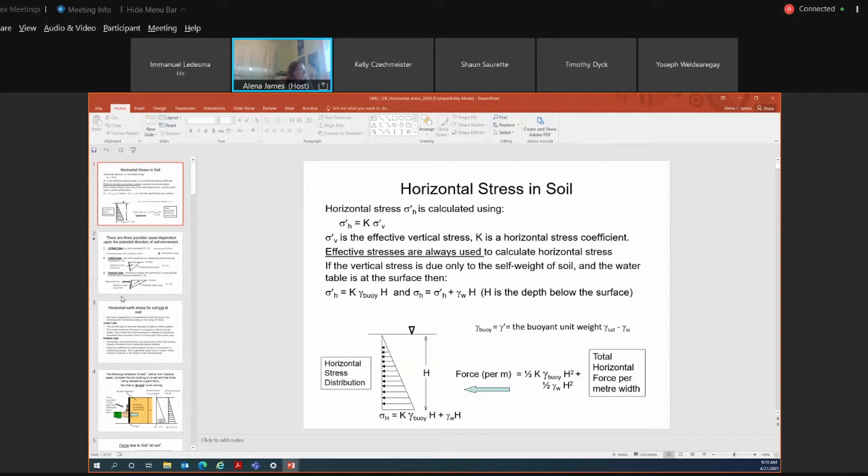There are 3 possible cases that may result in retaining wall design, and they're dependent on the potential direction of your soil movement. So if we think of a soil particle below the ground surface, that soil particle has a vertical stress, which is its overburden stress, and it also has a horizontal stress. We previously covered this in Module 4. That soil particle, when it's at rest, is not going to experience any movement.

The way we calculate our horizontal stress for that soil particle is we use our K0 value, which is our coefficient of earth pressure at rest, because that soil particle is not going to move. There's no external pressure being applied to it that would cause that soil particle to move. There is overburden pressure, but that overburden pressure isn't causing the soil particle to move.

The next possible case would be an active case. So if my hand right here is my retaining wall, this wall will have a soil mass behind it. Imagine this pencil represents part of that soil mass. This soil mass is trying to push this retaining wall downwards or outwards. There's a force being applied to that retaining wall that's trying to cause it to slide or overturn, pushing against the wall and moving it outwards. So that would represent your active case - soil pushing against the retaining wall and moving it outwards.

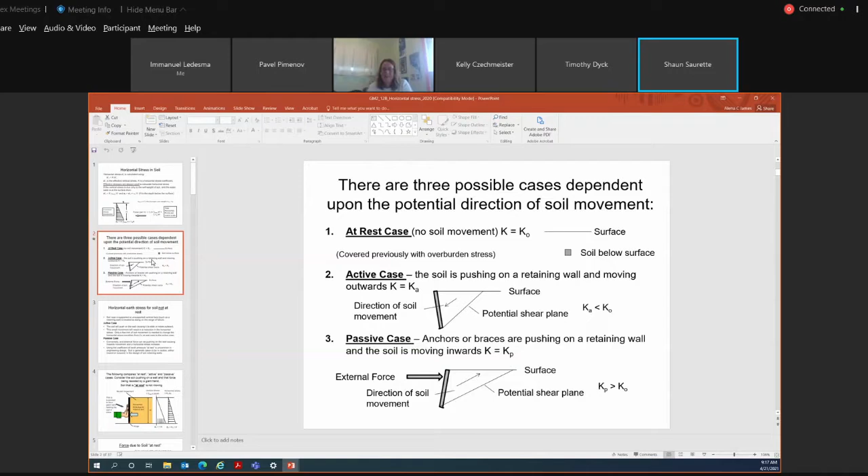Okay, so we use both of these forces in the calculation. It depends again on installation—you always use active, and passive depends on what type of structure you have. Cool, sounds good, thanks.

So if we think of our active case, our Ka value—our coefficient of active earth pressure—is always less than our K-naught value. So the horizontal stress associated with an active case is always less than the horizontal stress associated with an at-rest scenario. Whereas with our passive case, our Kp value is always greater than our K-naught value, so the horizontal stress or force associated with the passive case is always greater than your at-rest scenario.

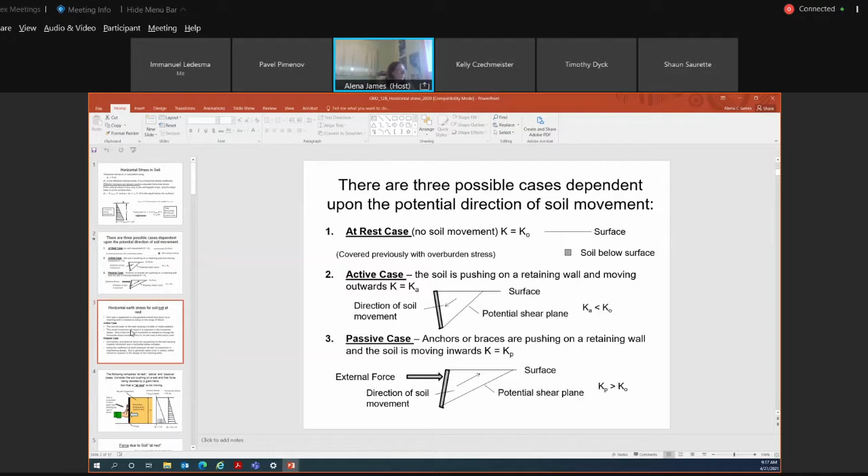Okay, we're not going to go over that again, I think I sort of covered it.

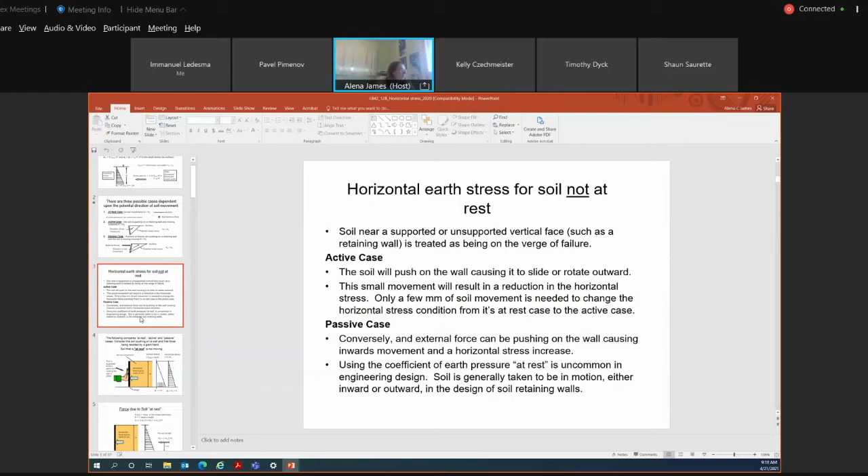This again is the same scenario I was trying to illustrate with my green pen and my pencil. This is just a schematic showing your at-rest case, where your retaining wall structure isn't moving. Imagine this is my retaining wall structure and I have a hand applying a horizontal force to that retaining wall structure, but my retaining wall structure isn't moving, so it's at rest.

If we look at our active case, again it's the same scenario where my hand represents the retaining wall structure, and imagine my other hand was applying a force to the left-hand side of it. If I decrease the pressure I'm applying to this side and relax my hand a bit, the retaining wall structure is able to move outwards, downwards, and outwards because I'm applying less force. So that's your active case.

And then your passive case would be the opposite of that, where if this is my hand, I have to apply additional force or pressure to this retaining wall structure to cause it to move inwards.

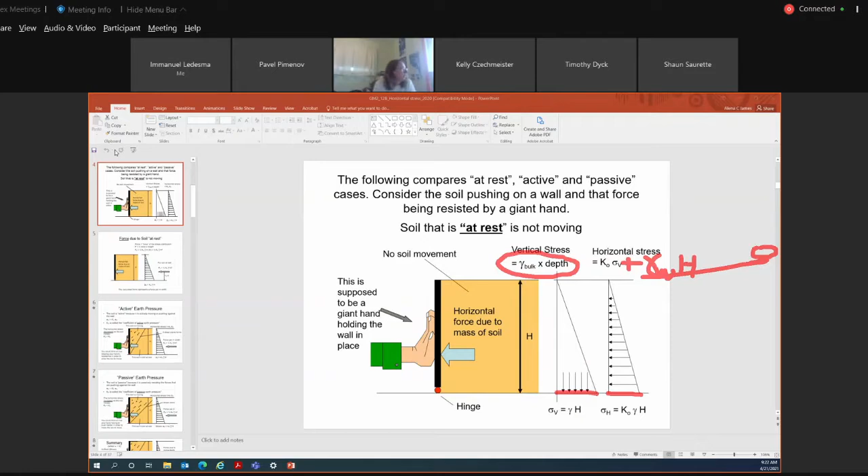Question about the saturated unit weight—probably we may have some questions on the test where we need to calculate that as well, based on the density. I'm not going to give you density, I would just give you gamma sat, but we'll go through lots of examples today where we look at scenarios where there's no pore water pressure associated with our retaining wall structure, and where there is pore water pressure associated with our retaining wall structure.

So we'll go through a wide variety of examples today.

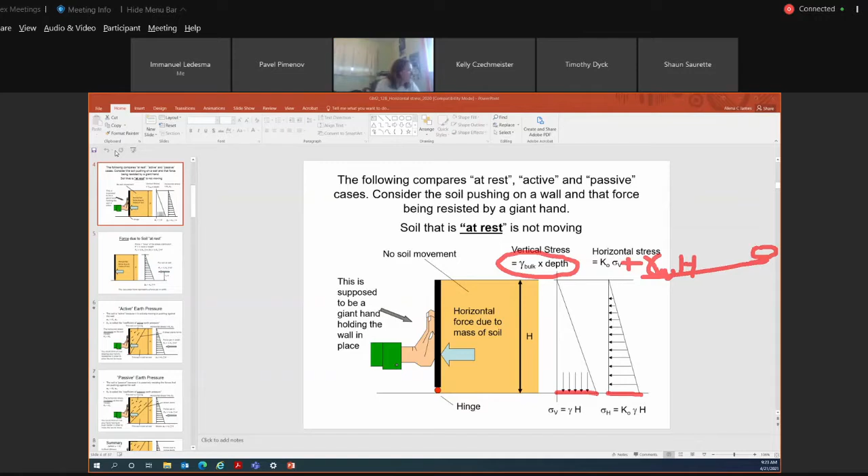So if we look at this slide here where it's talking about force due to soil at rest, we can calculate our total horizontal stress at the base of the sheet pile wall. In this scenario, we'll assume our sigma H, in this case we're looking at the at-rest scenario, but say it was the active case.

It would be sigma H is equal to Ka times gamma times H. This represents your total horizontal stress at the base of the sheet pile wall, and this represents the width of your triangle. If we look at the length of our triangle, the length is the same dimension as the height of the retaining wall structure.

So we know what the horizontal stress is at the base of the retaining wall structure. If we want to calculate the force, this simply is equal to the area of our stress distribution. You'll see our stress distribution is triangular in shape, so our force is equal to 1/2 times base times height, because this represents the area of a triangle.

If we know that the base of our triangle is equal to K naught, or Ka times gamma times H, and we know the height of our triangle is H, then we multiply that by 1/2. We can calculate what our force is that's acting on the retaining wall structure using this formula: PA is equal to 1/2 times Ka times gamma times H squared.

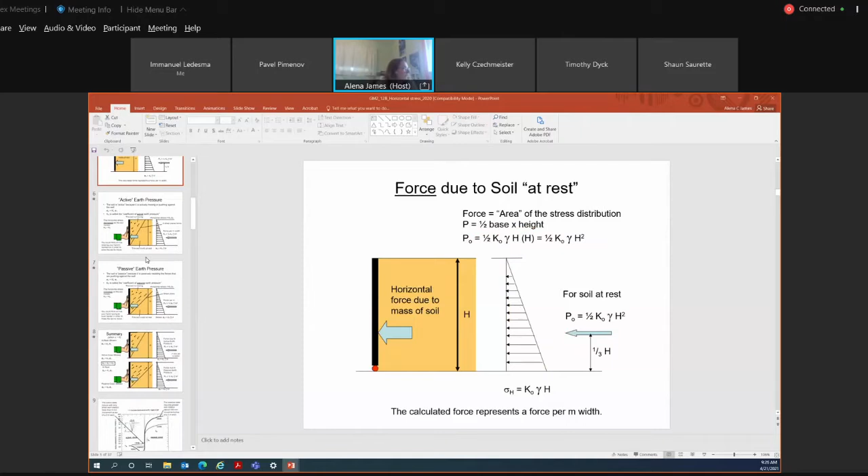It makes sense. We took uniform loads in statics as well, so it's very similar, just calculating different things. Oh, okay, good. Phew.

Okay, I'm going to go over an example problem. You guys are probably better at this than I am then.

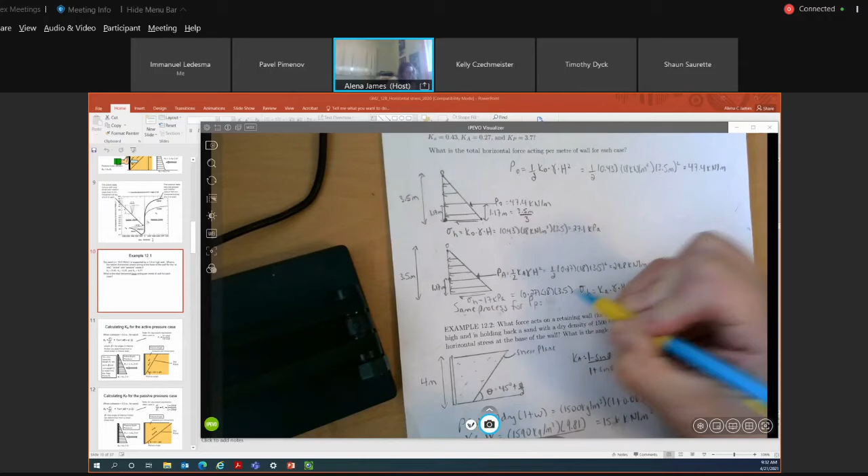I can substitute these parameters into the equation and calculate that my horizontal stress acting at the base of this retaining wall structure is 17 kPa.

If I want to calculate my total force acting per meter of the wall for the active case, I would use this formula: Pa is equal to 1/2 times Ka times gamma times h squared.

I know Ka, gamma, and h, so I can calculate my active force, which worked out to be about 29.8 kilonewtons per meter.

My next step after calculating my active force would be to determine where this active force is acting on the retaining wall structure. Again, my horizontal stress distribution is triangular.

Looking for the centroid of this triangle for a horizontal force, this horizontal force acts at a distance of h over 3 from the base of the retaining wall structure.

A distance of h over 3 from the base of the retaining wall structure is still 1.17 meters from the base of the retaining wall.

I would use the same process, which I haven't shown here, to calculate my total horizontal force in the passive case scenario.

In my passive case scenario, my horizontal stress at the base of the sheet pile wall would be Kp times gamma times h.

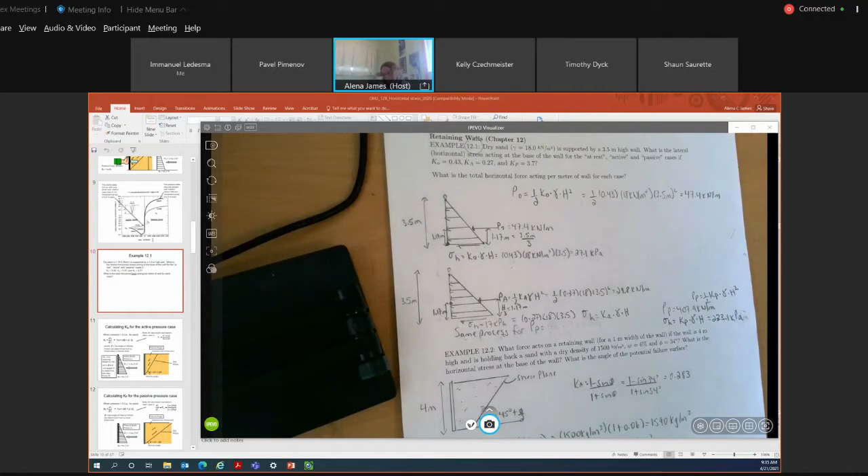Is this very similar to statics?

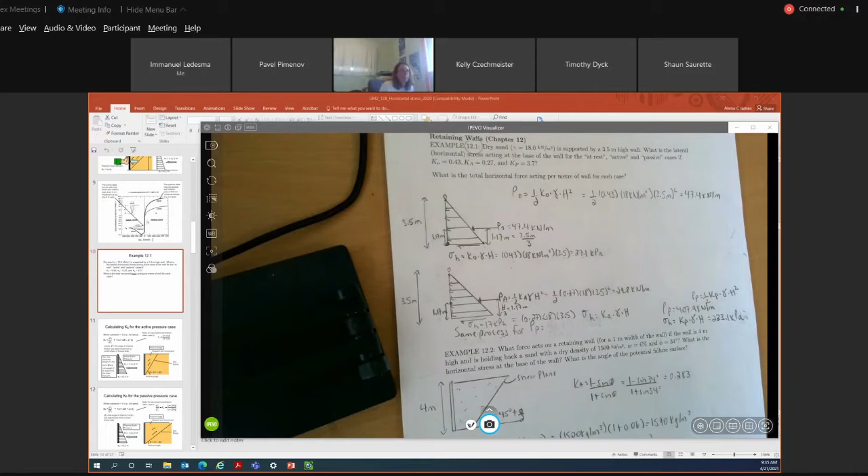So in most problems, sometimes you're given the Ka value or the Kp value, your earth pressure coefficient, either in the active or the passive case, but sometimes you're not. Sometimes you're only given your friction angle. But that's not a problem, because if you know your friction angle, you can calculate what your Ka or Kp value is.

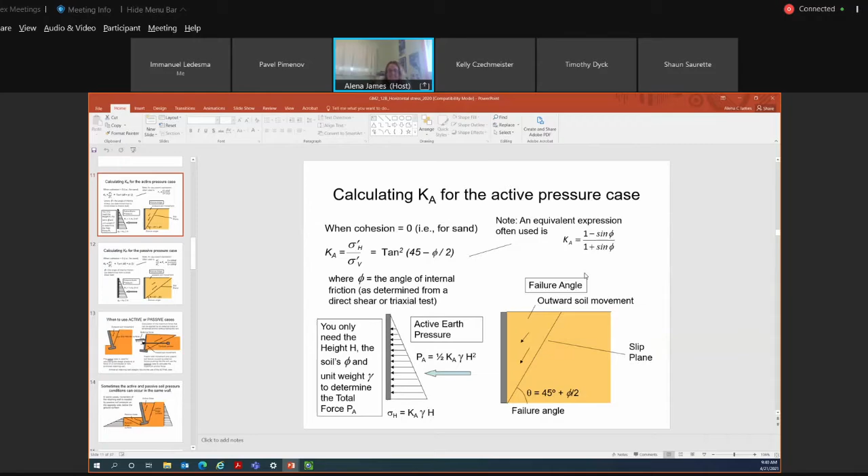Sound fair? So we don't have to worry about those formulas at all? You have to worry about Ka is equal to 1 minus sine phi divided by 1 plus sine phi, because that's your active case scenario. Passive case, I'm not going to test you on, because it gets a little complicated with calculating the forces associated with those anchors or braces. So don't worry about it. I just wanted you to be familiar and able to differentiate between when you would use your active case and your passive case scenarios.

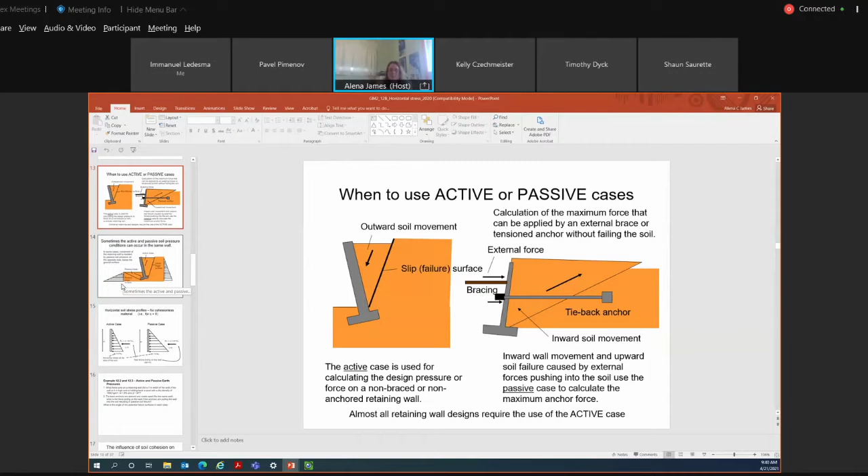Seem fair? So concentrate on active. Yep. Okay.

And that's why when Shaun asked the question initially, when do you use active, when do you use passive? There are cases where you will have soil on the left-hand side of your retaining wall structure. If you do, and it's below 1 meter below the ground surface, you have to take your passive forces into account. Again, it complicates the situation, and I don't think we need to go there. So don't worry, you'll never have to calculate your passive force on the left-hand side of your sheet pile wall, or associated with a tieback anchor or an external brace in this course. We're just going to concentrate on your active case scenario.

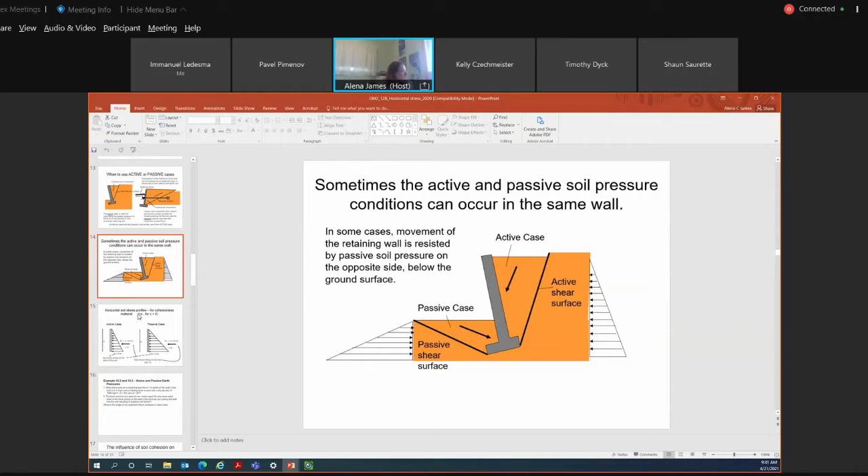Okay. Anyone have any questions before we move on?

Okay, so the horizontal stress profiles we've talked about for the last 40 minutes or so have all been for cohesionless material, say a sand or gravel material, and also for scenarios where we don't have any groundwater pressure acting against our retaining wall structure. This has simplified our process for determining our horizontal stresses at the base of the retaining wall structure and our total forces acting against the retaining wall structure.

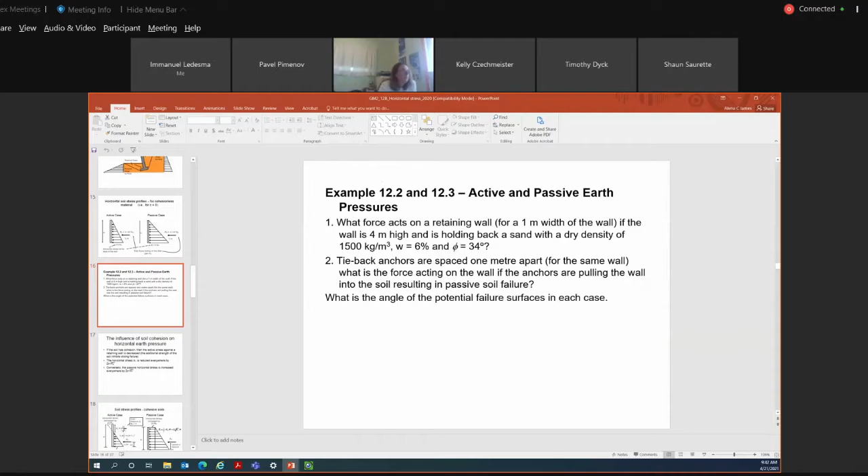Okay, this is example problem 12.3. We have tieback anchors along a retaining wall structure, spaced 1 meter apart. This problem asks what force is acting on the wall if the anchors are pulling the wall into the soil, resulting in passive soil failure, and what is the angle of the potential failure surface. I've drawn a basic free body diagram showing a 4 meter high retaining wall structure with 3 tieback anchors spaced at 1 meter intervals along the face of the wall.

So you'll see in this scenario, it's associated with problem 12.2. Our friction angle in this problem is 34 degrees, which came from example problem 12.2. And the unit weight of our material is 15.6 kilonewtons per meter cubed, gamma bulk. These parameters came from example problem 12.2.

Again, your KP value isn't provided, so we'll have to calculate it. Our KP value can be calculated if we know the friction angle. KP is equal to 1 plus sine phi divided by 1 minus sine phi. Since our friction angle is 34 degrees, we can plug and chug through the formula and calculate our passive earth pressure coefficient to be 3.54.

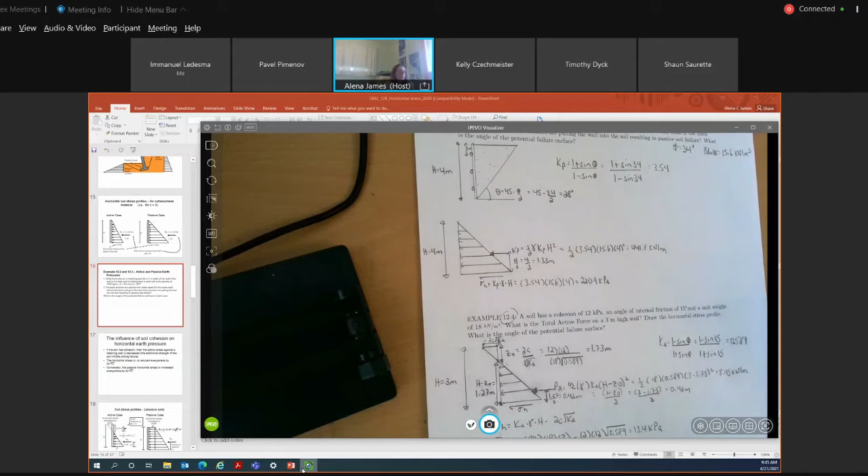So let's go down. I've drawn my horizontal stress profile or distribution for this retaining wall structure. My retaining wall is 4 meters in height, and I'll have a horizontal stress acting at the base of the retaining wall structure. I want to calculate this horizontal stress using my passive earth pressure coefficient, which is 3.54. My unit weight of material is 15.6, and the height of my retaining wall is 4 meters. Multiplying those parameters together, my horizontal stress at the base of the sheet pile wall is 220.9 kPa.

If I want to calculate the total horizontal force acting on this retaining wall structure in the passive case scenario, it would be PP equals 1/2 times gamma times KP times H squared. That's my formula to calculate my passive force. My unit weight is 15.6, the height of my retaining wall is 4 meters. So the total horizontal force acting on this retaining wall structure for the passive case is 441.8 kilonewtons per meter. Again, my stress distribution is triangular in shape, so the centroid of that triangular shape would be at a distance of h/3 from the base of the retaining wall. So that horizontal force acts at a distance of 1.3 meters from the base of the retaining wall structure.

Okay, I'm going to pause there to see if anyone has any questions.

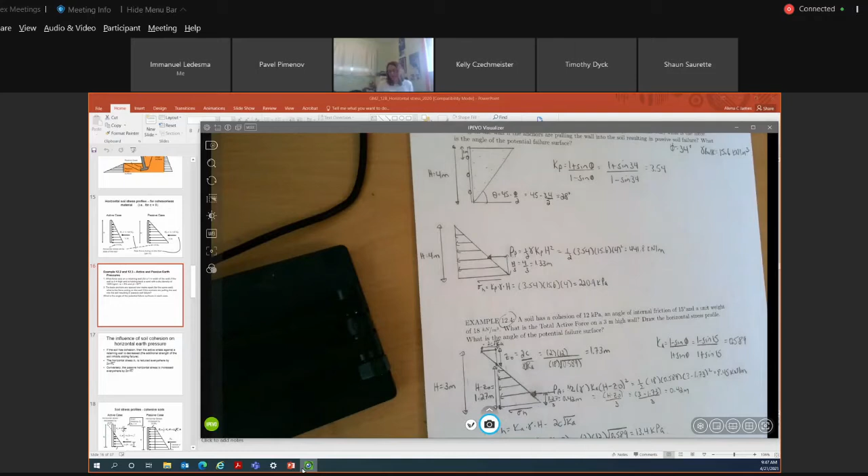Okay, so let's think of the influence that soil cohesion may have on your horizontal earth pressure. If soil has cohesion, this is actually beneficial because the cohesion provides additional strength that will inhibit a sliding failure from occurring. This additional strength actually reduces the active stress acting against the retaining wall structure. There are two different scenarios, the active case and the passive case. In the active case, our horizontal stress at the base of the retaining wall structure is reduced everywhere by the value of 2 times C, where C represents the cohesion of your soil material, times the square root of your active earth pressure coefficient.

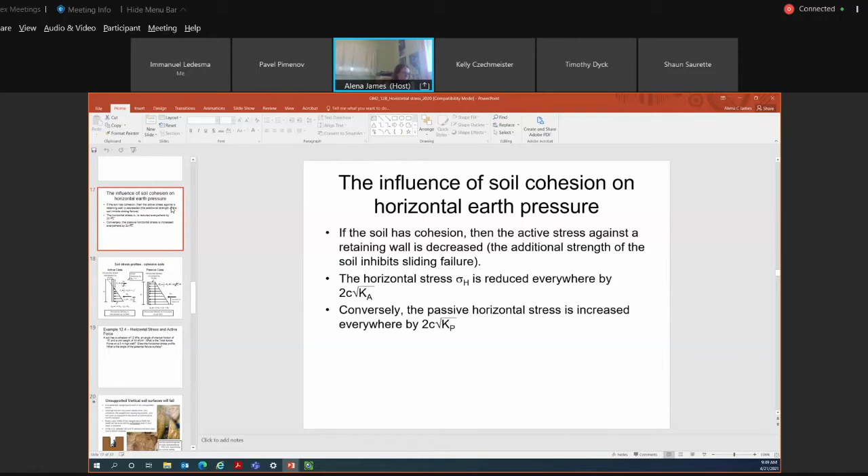Meanwhile, if we look at the passive case scenario, your passive horizontal stress is actually increased everywhere by the value of 2C, where C represents your cohesion, times the square root of your passive earth pressure coefficient.

Let's take a look at this slide, looking at the active case scenario. For the active case, even at the ground surface where we have 0 horizontal stress, our horizontal stress is still reduced by the value of 2C times the square root of Ka. Our stress distribution profile is still linear, but our horizontal stress is actually 0 until we reach this point of inflection, which is a distance Z0. We calculate that distance Z0 using this formula: Z0 equals 2 times your cohesion divided by your unit weight of soil material, times the square root of Ka.

So that point of inflection is an important point, and our horizontal stress distribution is decreased everywhere by that value of 2C times the square root of Ka. Whereas in your passive case scenario, your horizontal stress is increased everywhere by the value of 2 times your cohesion times the square root of Kp. So you still have your horizontal stress distribution profile, but in this scenario this 2C times Ka forms this rectangular shape.

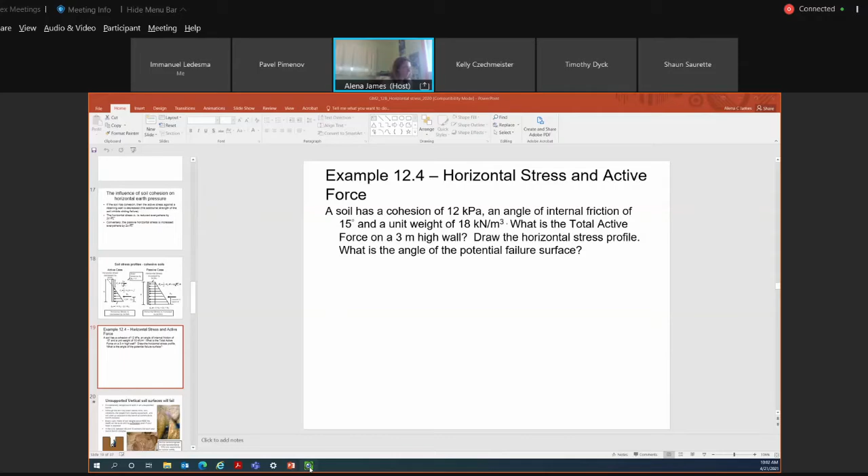Okay, example problem 12.4. It says the soil has a cohesion of 12 kPa and an internal friction angle of 15 degrees, and a unit weight of 18 kilonewtons per meter cubed. What is the total active force on a 3-meter high wall? And it asks to draw the horizontal stress profile, and what is the angle of the potential failure surface.

So you'll see this horizontal stress distribution is a little bit different than the ones we've drawn in the past. Initially we have our ground surface, but our horizontal stress is decreased everywhere by this value of 2C times Ka. So we go into the negatives a bit, and our horizontal stress decreases from 0 to minus 2C times Ka. Our horizontal stress does increase linearly with depth until we reach our total height of 3 meters.

But as I mentioned, there's this point of inflection where we can calculate the Z naught distance, representing the portion of our stress distribution where our horizontal stress is equal to or less than 0. We calculate this Z naught distance using the formula 2C divided by the unit weight of your material, times the square root of Ka. Cohesion was given in the problem as 12 kPa, and the unit weight of the material was given as 18 kilonewtons per meter cubed.

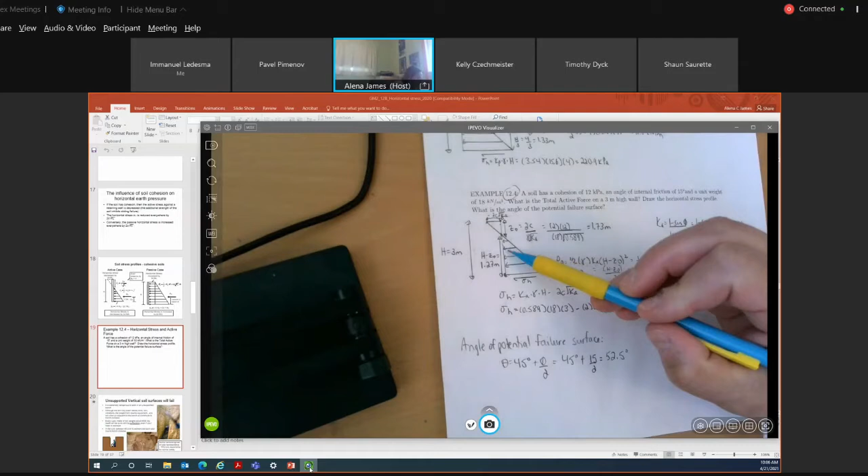Our last step would be to calculate or determine the distance at which that active force is acting from the base of your retaining wall structure. So again, we need to determine the centroid of this triangular shape, looking at the centroid of the triangular shape that is below your point of inflection.

It would be H minus Z0 divided by 3. H is 3, Z0 is 1.73. So you can determine that your active force is acting at a distance of 0.42 meters from the base of your retaining wall structure.

What is your angle of your potential failure surface? Again, this is a review of what we did, maybe module 6 or so, where theta is your failure surface, equal to 45 degrees plus phi over 2. Phi is 15 from the problem, so your angle of your potential failure surface would be about 52.5 degrees. We don't have to focus on that so much, I'm not going to test you on that. That's just a recall of previous material covered in the course.

Elena: When we write the test and have to hand in work, are you going to require us to draw this out? Yes. So I will ask you for free body diagrams, or I will ask you to draw your horizontal stress profile or horizontal stress distribution, but I'll probably call it a horizontal stress profile. You will be required to draw all of it out. So all of the questions associated with the calculations on this test, you'll have to submit your work for, because you'll be drawing these stress profiles, calculating horizontal stresses, total forces or active forces, that sort of thing. I need to be able to see what you're doing.

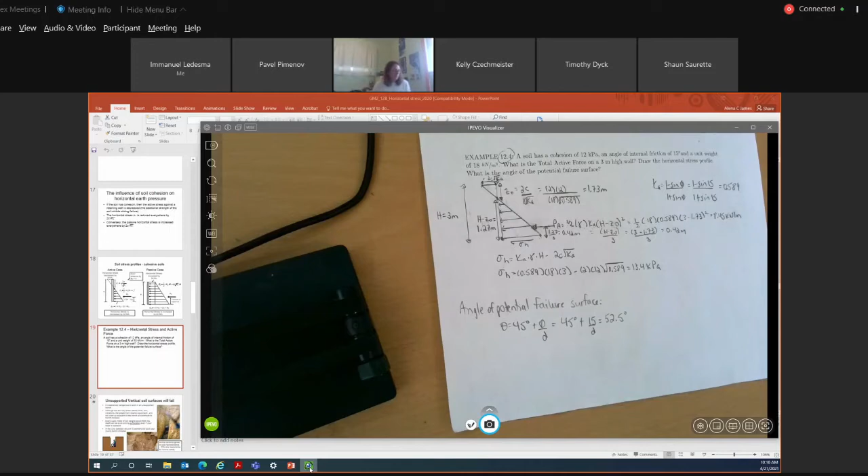Any questions on calculating your active force or your horizontal stress at the base of your retaining wall when you have soil with cohesion? No? Okay, when you're going through them, if you have any questions, just contact me.

Okay, the next topic we're going to cover is unsupported vertical soil surfaces. I feel we don't spend enough time on this. I might look at expanding it in the future. If you can't remember anything that I taught you in this course for retaining walls, and this is the only thing you remember, I'm okay with that after you write test number 4.

So please, please, please never enter an unsupported excavation. Code is 5 feet or 1.5 meters, but even that, especially if you're smaller in stature, is pretty deep. So it's extremely dangerous to work in an unsupported trench. I'm sure you guys, every couple of years we hear a really sad story where someone suffocated or was buried alive in an unsupported excavation and they didn't make it out. So it is really dangerous to work in an unsupported trench.

You may think your soil seems stable, but maybe over time it rains, there's vibrations from heavy equipment, or there's weight from stockpiled material or weight from nearby equipment. It can cause that trench to collapse, and this material can fall on you. Every cubic meter of soil weighs 4,000 pounds, so death will be quick and by suffocation. Even if your head is exposed, likely your internal organs are going to be crushed and you're going to die.

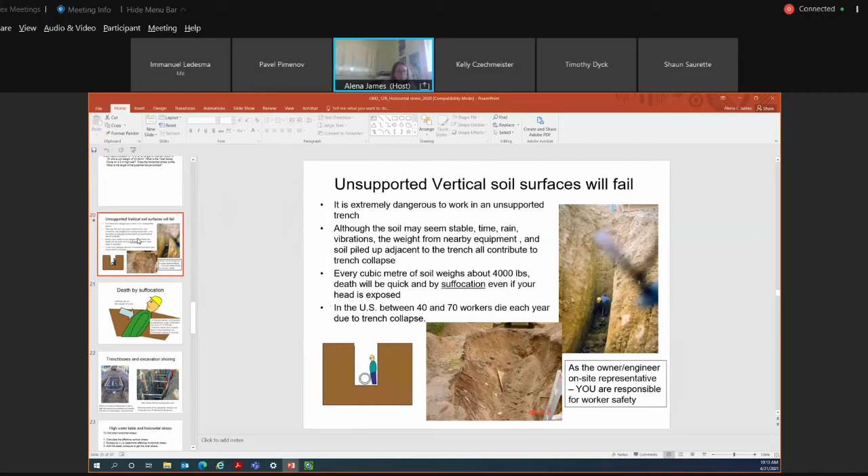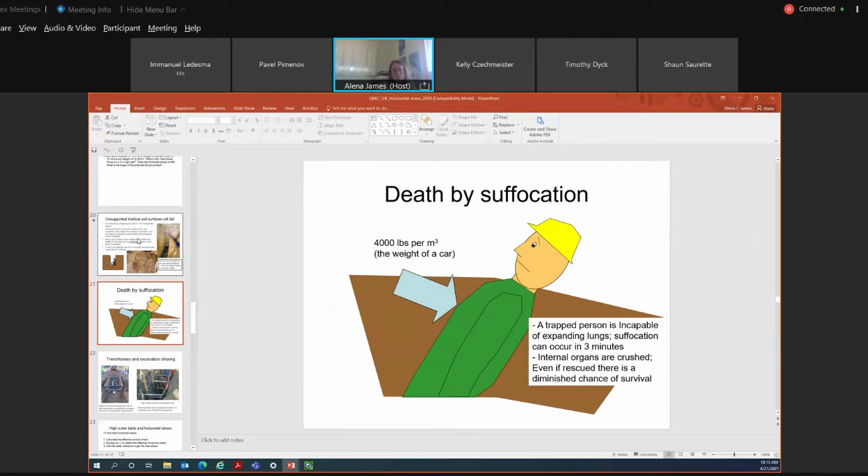So a trapped person, as I mentioned, even if your head's sticking out, if you're trapped, your lungs can't expand, so you'll suffocate. And all your internal organs will be crushed, and you're likely not going to survive.

There are guidelines for working and designing excavations under the Manitoba Workplace Safety and Health Division for excavation requirements. I can post the link, or put it on Learn if you guys like. All shoring or temporary excavation needs to be designed, sealed, and inspected by a professional engineer. So if your boss says it's all good, again, you have the right to refuse to enter that excavation or trench. After test 4, if you don't remember anything else I taught you for retaining wall structures, just remember this. If you can remember this, then I was successful.

Any questions? What was the height you said? It's 5 feet is what the provincial guidelines are. I think that's a little high because some people are barely over 5 feet, right? Yeah, you'd think it would be like half your height.

I would think 3 feet is what it would be, because then for most people that would come up to their waist, right? And you wouldn't be crushing internal organs in your lungs and that sort of thing. Again, you do have the right to refuse to enter any excavation or trench if you feel it's unsafe. And there's guidelines depending on the different material types as well.

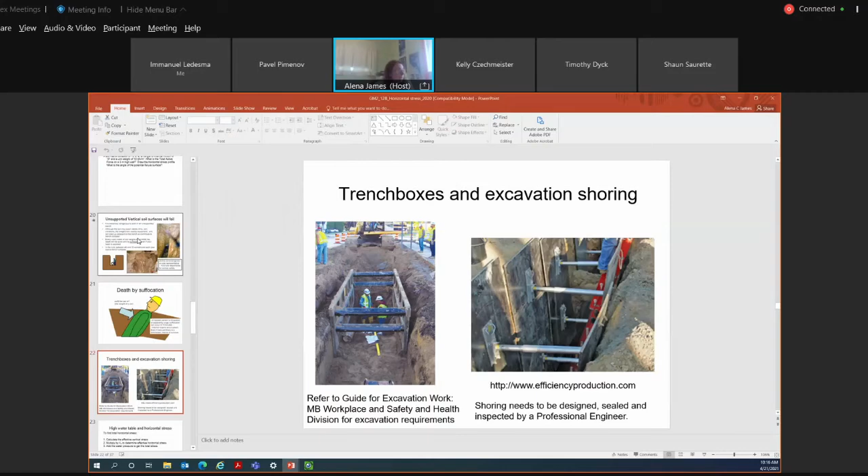So as I mentioned, if this is all you take away from the course... oh goodness, yeah, that's really sad. I hope none of you ever have to experience this.

Okay, well, let's move on to something maybe a little more uplifting.

So there are scenarios where you may have a high water table acting on your retaining wall structure. To date, we've only discussed retaining wall structures with backfill material considered well drained, or backfill material that doesn't have any excess pore water pressures associated with it. But what do you do when you actually have backfill material that's saturated and you're going to have a pore water pressure associated with it?

Recall back to module 4, we calculated what effective stresses were. Remember, I said when we're calculating our total horizontal stress, we always use our effective stress. So in the case of well-drained soil, we've never been taking pore water pressure into account. That's because our effective horizontal stress is equal to our total horizontal stress because there was no pore water pressure associated with it. However, when you have a high groundwater table, your total horizontal stress...

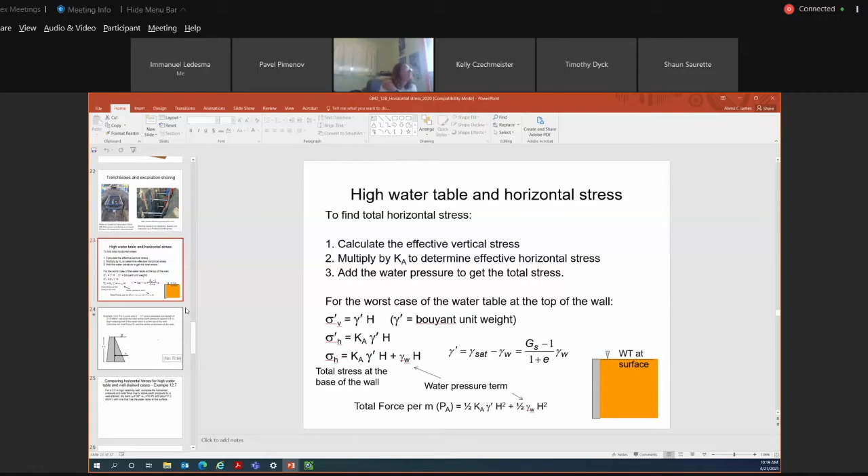Okay, let's go over example problem 12.7. And I'm going to ask you some questions about it.

So 12.7 is comparing horizontal forces for a high water table and well drained cases. The retaining wall structures are exactly the same in height, 3.5 meters. So we're going to compare the total force due to active earth pressure for the well-drained soil, which would be a sand material. The material properties are given there.

You have a friction angle, you have a bulk unit weight, and it gave you a dry unit weight, and it gave you gamma sat, or your saturated unit weight. Compared to one that has a water table at the ground surface.

So let's talk about the well-drained scenario. When you have a well-drained scenario, it means your water table is below the base of the wall. So if your wall is 3.5 meters in height, your water table is below that, so it doesn't come into play when you're designing your retaining wall structure.

The first step would be to calculate your active earth pressure coefficient. We can use our handy dandy formula. The only parameter we need to know is our friction angle, which was given in the problem as 38 degrees. So we can calculate our Ka value, and that works out to be about 0.238.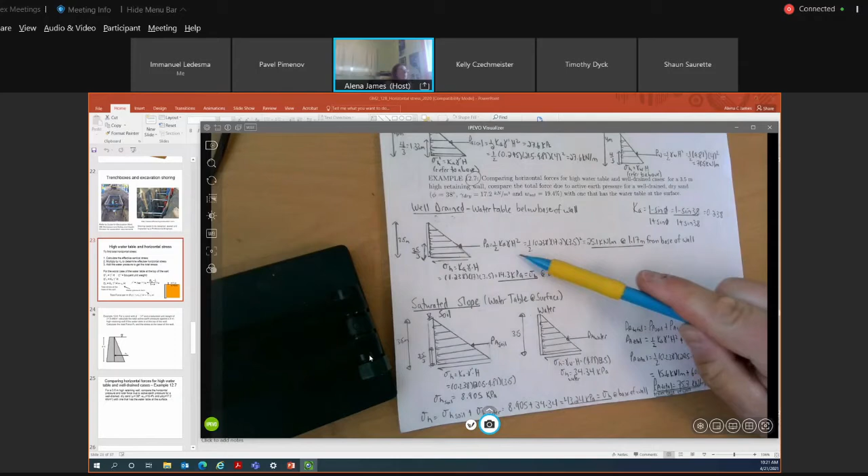For our total active force, we use this standard formula. We know Ka, we know our unit weight of material is 17.2, and we know the height of our retaining wall is 3.5. So our total active force acting on the retaining wall structure is 25.1.

We're just assuming here, Fabian, there wasn't enough information given to calculate what it would be. They didn't give you a moisture content, assuming it wasn't saturated, so I just used the value that was given. Don't get hung up on that. I'm not going to ask you guys to go through the process on a test to calculate what unit weights are, because that's not what I'm really testing on this material.

So we have 25.1 kilonewtons per meter, and it's acting at 1.17 meters from the base of the wall. We know it's a triangular shaped distribution, and we know our centroid's at 1/3 times h. Nope, Pavel, you can't calculate it, there's not enough information.

So we know it's at 1.17 meters from the base of the wall. This is for the well-drained scenario, exactly the same scenario that we've worked on in the last hour. You're not in the saturated, well-drained scenario because we don't have any pore water pressure associated with it. Inherently there would be some water content associated with the soil, but it wasn't given, and only a saturated moisture content was given. So don't get hung up on those details.

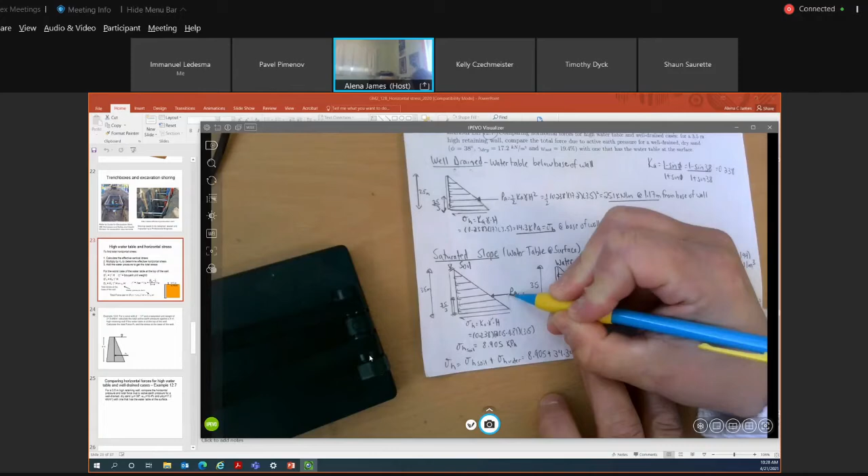So I calculated my total active force acting on this wall to be 75.7 kilonewtons per meter. I know my horizontal force acts at a distance of 1/3 H from the base of this retaining wall. Both of the stress distributions are triangular, and the distance from the base is simply H over 3, which is 3.5 divided by 3. So it acts at a distance of 1.17 meters, here and here, from the base of the retaining wall.

What does it say under your PA total there? From base of wall. Okay, so it's acting at 1.17 meters from base of wall.

So what do you guys notice about the differences in your horizontal stresses and your active forces associated with the well-drained scenario versus your saturated slope? Saturated gives a lot higher numbers.

Exactly. So do you think this would be cause for concern if you have greater forces acting on your wall trying to push it outwards and downwards? Do you think that's a positive to have water against the retaining wall structure, or a negative? Definitely a negative. You have more force acting against the wall, trying to overturn it, trying to cause it to slide. You have greater stresses at the base. It's just all a recipe for causing potential instabilities.

So would it be valuable to add significant draining around the area? Yes, exactly. You could add some sort of drain structure with a drainage pipe, use different types of backfill, more granular type backfill. You would put something similar to a chimney drain, have a longitudinal drain, and put impervious material on top if you have common backfill, to reduce the amount of infiltration into the backfill material adjacent to the retaining wall structure. Yes, water for a geotechnical engineer is our enemy—it causes a lot of issues.

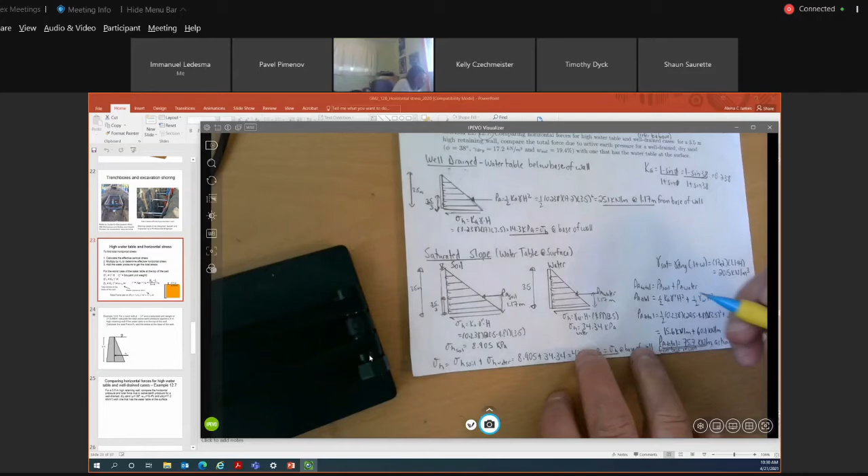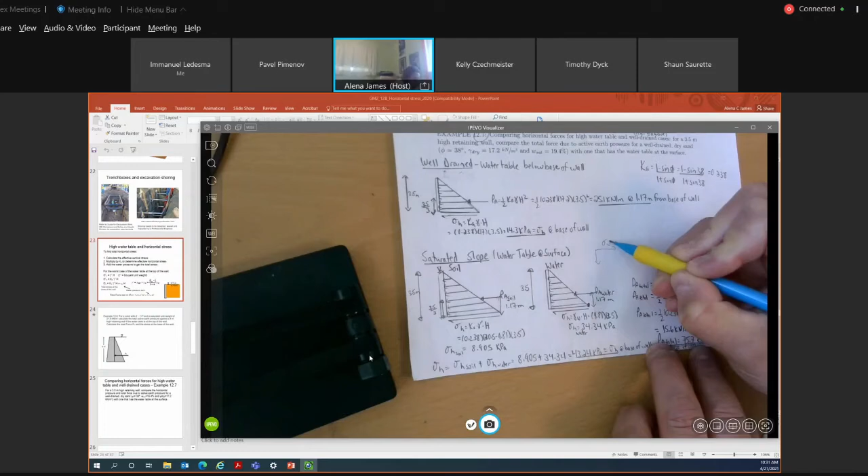So drawing these horizontal stress distribution profiles, they seem quite similar to drawing a vertical stress profile, right? From module 4, very similar. Let's take a look at this. This is saying your horizontal stress at this point, at a distance of 3.5 meters below the top of this retaining wall structure, is 34.3 kPa. So it's going to be the same—remember how we did this, where we had stress versus depth, and we used to draw it like this? And we'd have a value. So instead of it being sigma V prime, it's now sigma H. So we have a depth of 3.5 meters, and then we would have a total horizontal force at that point. See the correlation?

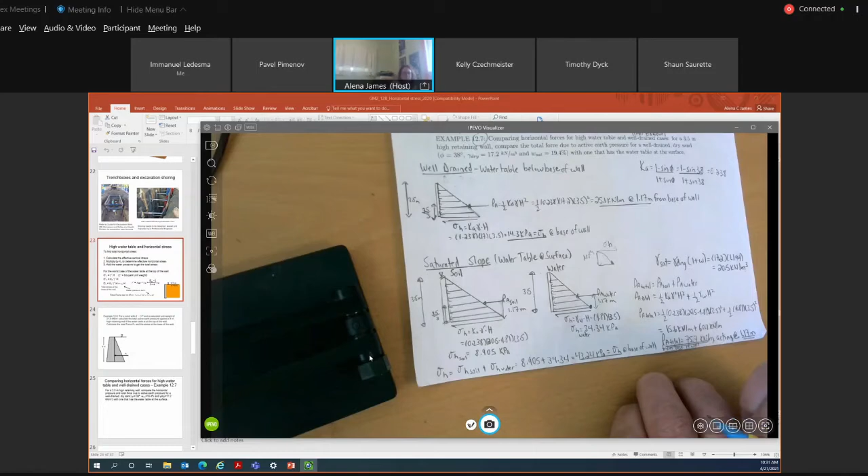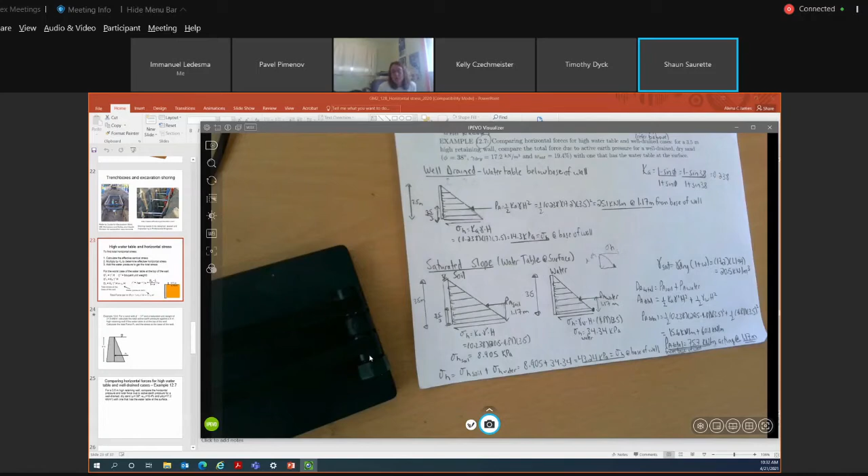And so why not just draw them both in one and have one for the total? You can—I just broke them out so you could see the difference, but you're more than welcome to draw it as one. If you're more comfortable drawing it as one, I'm okay with that.

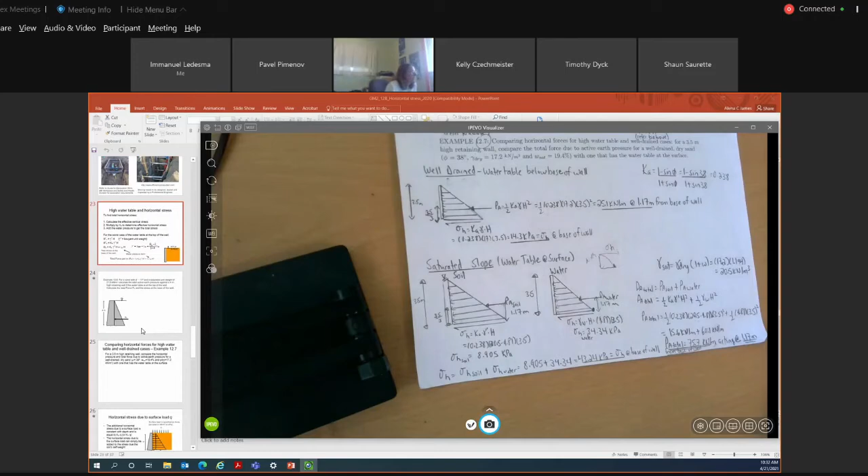Okay, well, let's move on. There's one other scenario we could potentially see when designing retaining walls, and that would be a horizontal stress due to a surface load Q. Imagine if you were designing a retaining wall structure but were going to place some embankment fill above it, or have heavy equipment running on top, or put houses or anything that would load the top, any sort of surface load at the top of the retaining wall structure—you need to design for that as well.

So that additional horizontal stress due to the surface load is constant with depth. Instead of being triangular in shape like our horizontal stress distribution, it is more rectangular in shape, since the value of Q isn't changing with depth. It's constant, so it forms this sort of rectangular shape right here.

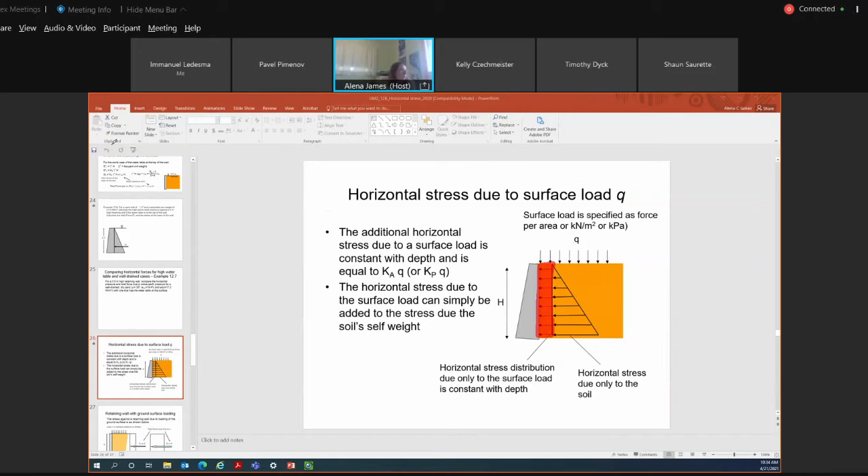This represents your Q value. You calculate the horizontal stress associated with that surface load Q by multiplying it by Ka, your active earth pressure coefficient, or Kp if designing in the passive case. So your horizontal stress due to the surface load can simply be added to the stress due to the soil's self-weight. The triangular portion represents the soil's self-weight, and this rectangular portion represents the surface load. Surface load is always reported in kPa or kilonewtons per meter squared because it's a stress.

A little bit differently than your horizontal stress profile associated with the soil's self-weight or overburden pressure, your centroid for this rectangular shape is different. The centroid location is at a distance of h/2 from the base of the sheet pile wall, and that's the same in both your active and passive case.

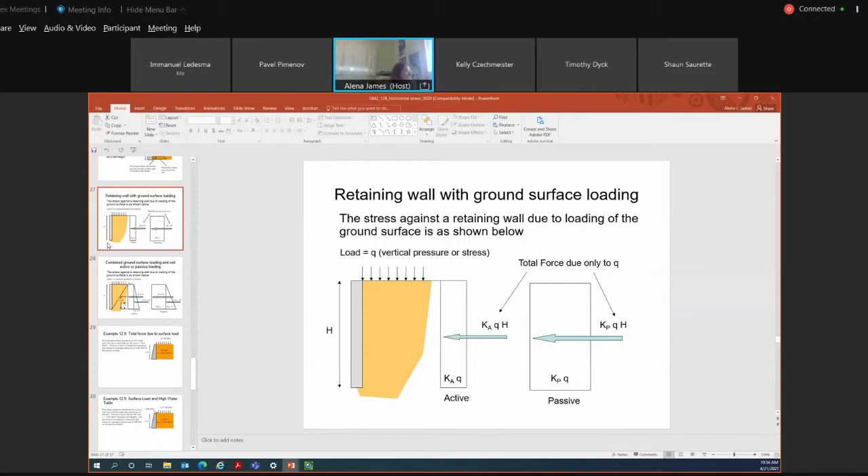So if we look at it here, this portion represents the soil self-weight or overburden pressure. Your total force acts at a distance of h/3. So this total force here acts at a distance of h/3, and this force here represents at a distance of h/2. So the location of where those forces act is slightly different.

You can, if you want, determine an overall location, but I'm not going to ask you guys to do that. I'm assuming you did that in statics, looking at different shapes and taking an average of them to determine where your centroid would be located for a more trapezoidal shape. Did you guys do that?

No? Okay. Yes, well, we have, but it's been a while. Yeah, it's been a while.

Let's just focus on being able to determine the location of your centroid for a rectangular or square shape versus a triangle shape.

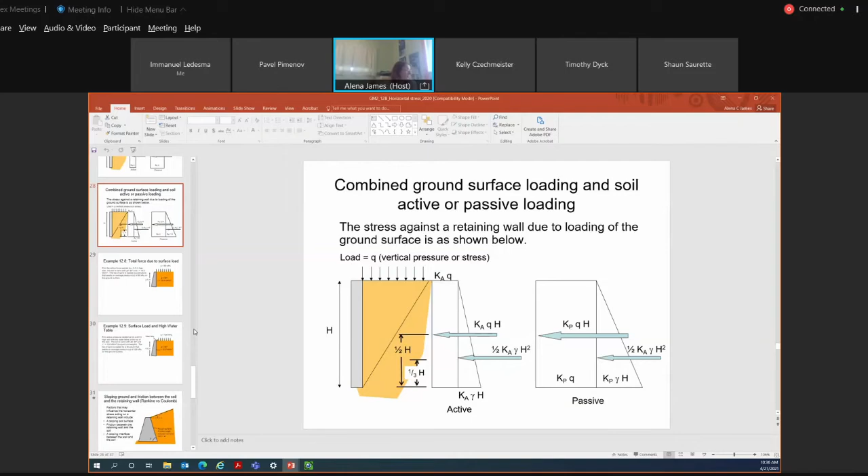The structurals were all over it. When I taught foundation design last term, they were all over it. We were integrating and doing whatever. It hurt my brain, actually. They really like math.

Okay, let's work through example problem 12.9. This is the full meal deal. This is the most complicated problem that you'll ever see in this course, so I think this is a really good problem to be working through.

Example problem 12.9 asks you to find your active pressure resistance, so your active force for a 4-meter high wall. You have a water table at the top of the wall. The soil is a silty sand, with a friction angle of 30 degrees and a buoyant unit weight of 12.8 kilonewtons per meter cubed. The top of the sand is loaded by a structure that exerts an average surcharge load, or average pressure Q, of 120 kPa on the ground surface.

So we need to determine what our total horizontal stress is at the base of the retaining wall structure, and what our total horizontal force is that's acting on this retaining wall structure.

Where do you guys think we should start? How many different shapes are we going to have? What do we need to consider? We'll have a shape associated with what?

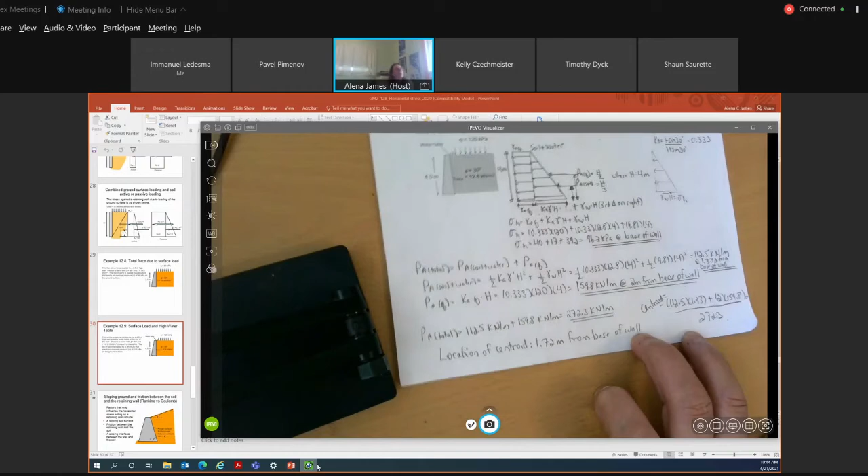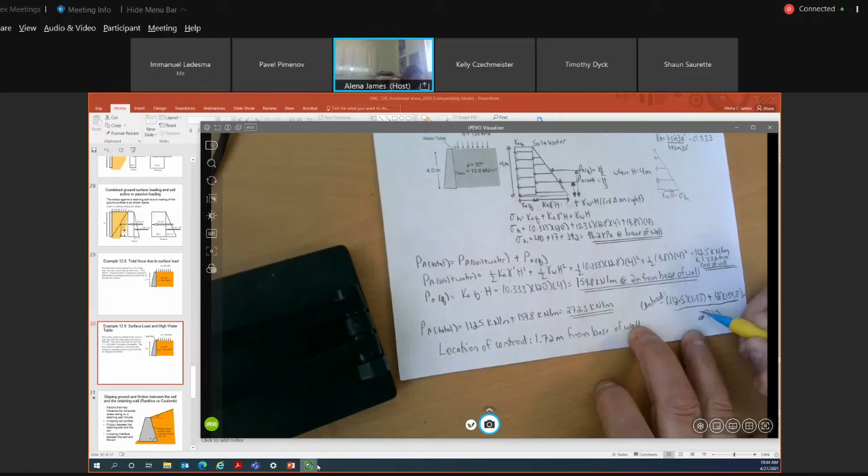For those who are interested, bringing back statics and strength of materials, I don't know if you had pleasant thoughts or if it's just bringing back some nightmares. I'm not going to ask you to do calculations to determine where your overall active force would act against the wall, but for those who are interested.

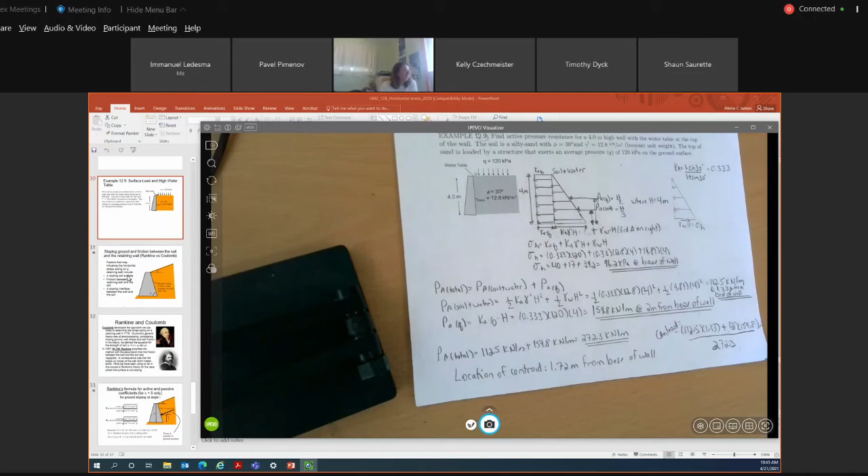One more slide: sloping ground and friction between the soil and the retaining wall, Rankine versus Coulomb. We've been using Rankine and the theory behind Rankine for our calculations associated with the retaining wall structure.

There are factors that may influence the horizontal stress acting on a retaining wall. You could have a sloping ground surface. You could have friction acting between the retaining wall and the soil, or you could have a sloping interface between the wall and the soil. All of these may influence the horizontal stress acting on the retaining wall structure.

Using Rankine, we've neglected the sloping interface between the wall and the soil and the friction between the retaining wall and the soil. There is a chart you can use to determine how your sloping soil surface may impact your Ka value.

That we're going to remove from the course this year. I just wanted you to recognize that we've been using the Rankine method. If you were to use the Coulomb method, you would take all of these factors into account, and the design process would be a little bit different. But just recognize there are some limitations to the methodology that we've used.

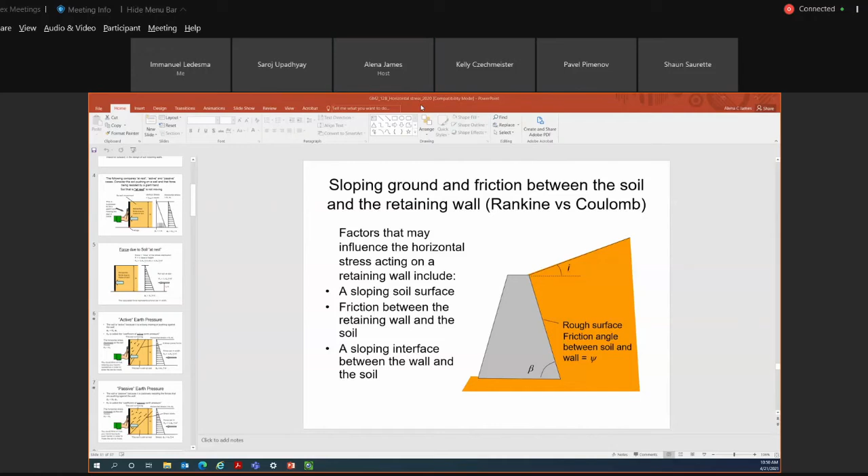I don't get it. Everyone in my neighborhood is retired, so I don't know why my internet went down.

We'll give everyone a few minutes. Obviously, my internet and my computer are done for the day, obviously.

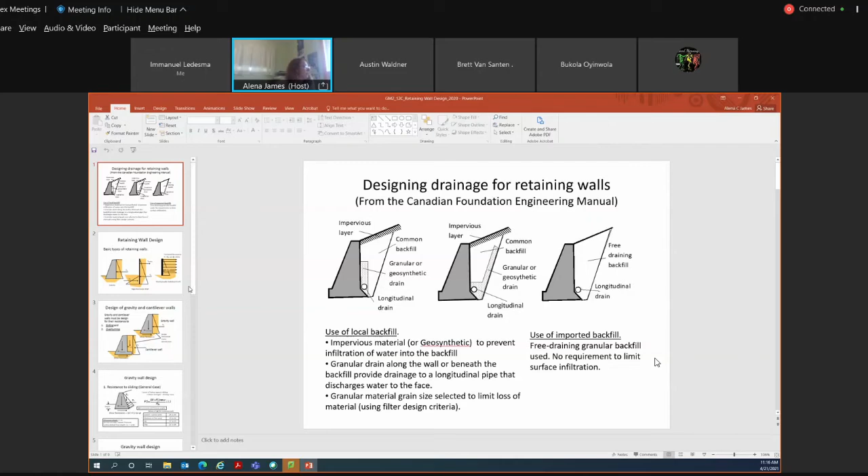These are some just basic types of retaining wall structures. So you'll see examples of these in the first PowerPoint presentation, along with photographs showing what they look like. For this portion of the course where we're calculating factor of safety, we're going to focus on gravity and we're going to focus on cantilever retaining wall structures. But in the first PowerPoint, you'll see examples of mechanically stabilized earth retaining wall structures. You'll also see examples of sheet pile walls. You'll see examples of soldier pile walls, modular walls, and various other types of retaining wall structures.

How many people do we have? 22. Okay.

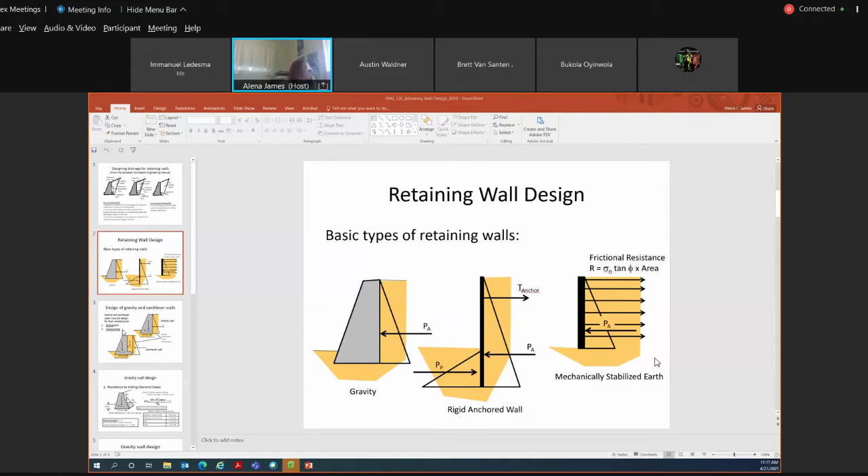So now we're going to focus on the design of gravity and cantilever retaining wall structures. Gravity and cantilever retaining walls must be designed for resistance to both sliding and overturning.

You can differentiate between gravity and cantilever retaining wall structures in the sense that a gravity retaining structure doesn't have a component of soil that acts on the base of the sheet pile or the base of the retaining wall structure. With this cantilever structure, there's a soil mass that acts on a portion of the retaining wall structure.

That mass of soil is preventing the retaining wall structure from overturning and sliding, providing some resistance. If you think of factor of safety as resisting forces divided by driving forces, that soil mass provides a resisting force and shear resistance to both overturning and sliding. A gravity retaining wall structure doesn't have that soil mass acting on the actual concrete portion, so that's how you differentiate between a gravity and a cantilever retaining wall.

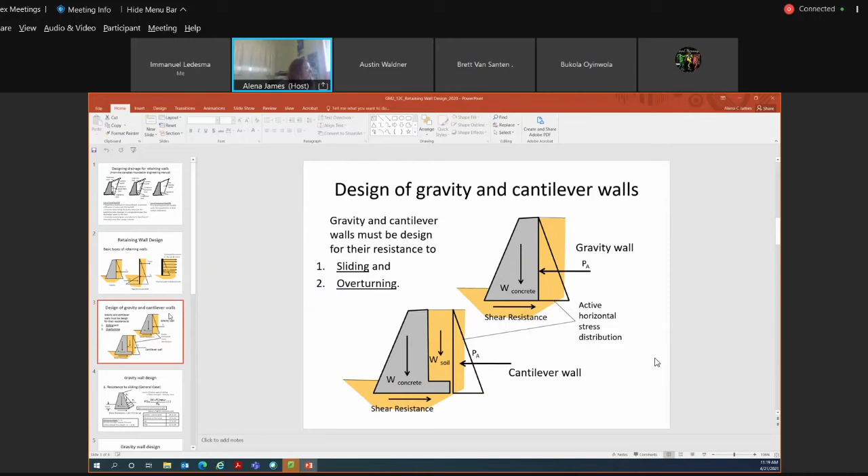Gravity wall design, and same with cantilever wall design, looks at two components. The first is resistance to sliding. Think of factor of safety in terms of resisting forces versus driving forces - we always want resisting forces to be greater than driving forces, and ideally 1.5 times greater. That's our traditional definition of factor of safety.

If our shear strength or shear resistance is significantly higher than our driving forces, then we would consider our retaining wall structure to have an acceptable factor of safety.

If we look at the shear resistance of our retaining wall structure, it can be found along the base of the structure. Shear resistance equals the weight of your retaining wall structure - related to the shape of the structure and the unit weight of concrete - plus any forces acting in the vertical direction, times the tan of psi. Psi represents your concrete soil friction angle.

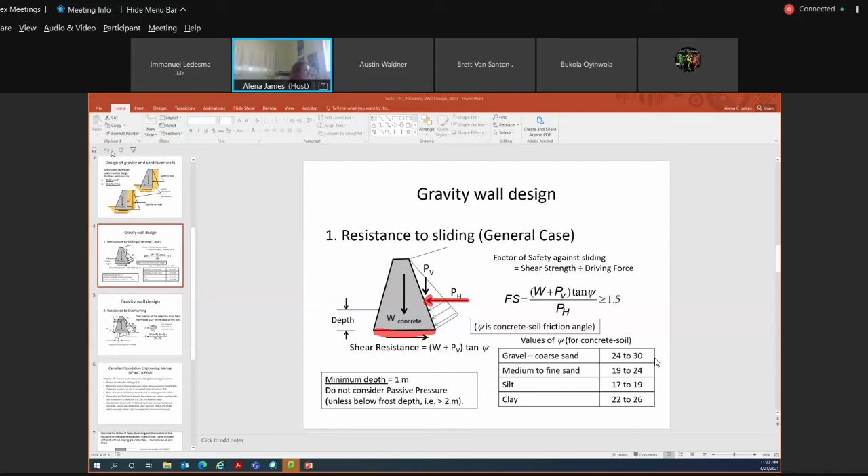If we look at resistance to overturning, again we can think of it in terms of factor of safety - we always want our resisting forces to be greater than our driving forces. So in this instance, for the design of a gravity retaining wall structure...

We're going to use the location of the reaction. When looking at the location of the reaction, it must be in the middle third of the base of the wall. This value D, the distance from the toe of the retaining wall structure to this point, represents distance D. D is calculated by taking the sum of the moments about the toe of our retaining wall divided by the sum of our forces in the Y direction.

So the sum of the forces about the toe would be the weight of your retaining wall structure plus any forces acting in the vertical direction, minus any forces acting in the X direction. You take their moment arms associated with each of those different forces, divided by the weight of your retaining wall structure plus PV, which is any force acting in the vertical direction. We don't usually have anything other than the weight of the retaining wall structure, so generally PV becomes 0 in our example problems.

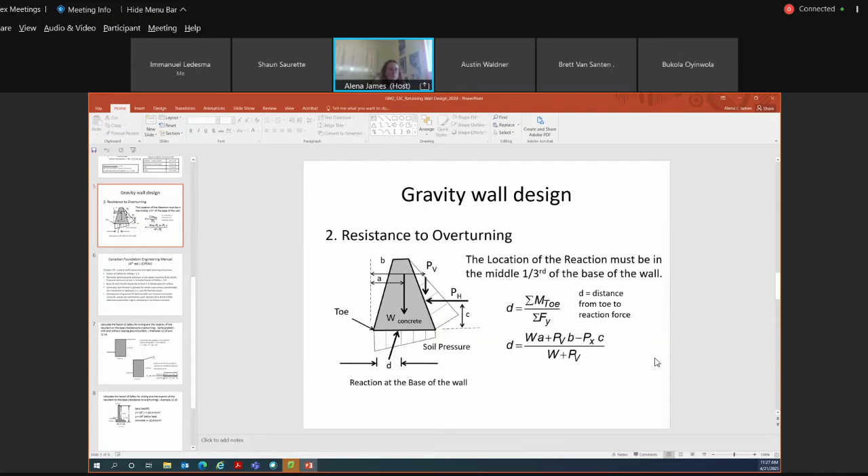So again, it would be good to have an understanding of these free body diagrams, where the various weights associated with your retaining wall structure, and your associated soil mass, water, and surcharge load, would act on your retaining wall structure. I'll go over example problems and show what your free body diagram should look like.

Would they ever anchor those to solid rock structures nearby? Yes, they would anchor them if needed to provide resistance to overturning or sliding, most definitely. Is that just in a case where the factor of safety is too low? Yes, correct, and you need some additional force to ensure your wall's stable. So if you have a large soil mass acting against your retaining wall structure, you would anchor it.

Good question - is that kind of how the Hoover Dam works? I don't know, I'd have to look that up. Is it anchored? I'm not 100% sure. It's in between those two rock structures, right? Yeah, I'll take a look and get back to you, I don't 100% know actually. I think the sheer amount of concrete in the Hoover Dam would weigh it down enough to hold it in place. I have a picture of myself - I can envision it because I went there probably 12 years ago, and there's a picture of me during construction where it looks like I'm holding it up. I don't know if that road's still there because this was 12, 13 years ago.

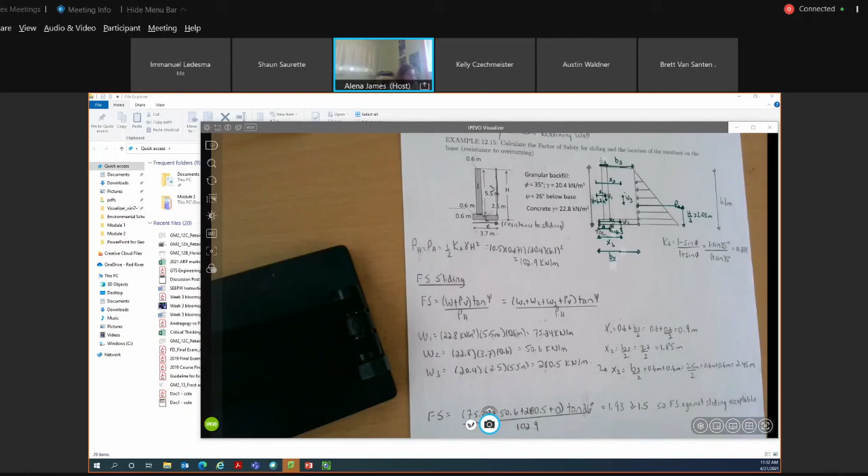My next step here would be to calculate what is my horizontal force, or my Pa value associated with the overburden stress of the soil material adjacent to the retaining wall structure. So Pa is equal to 1/2 Ka times your bulk unit weight, because there's no pore water pressure associated with this scenario, times the height of your structure squared.

The height of our structure here is 6.1 meters. It's 5.5 meters from here to here, and then the height of the base of my retaining wall structure is 0.6 meters, so the overall height of my retaining wall is 6.1 meters. I went through and calculated that value, and my Pa value is equal to 102.9 kilonewtons per meter.

So I'm going to do my first calculation, which is my factor of safety against sliding. I use this formula here, where it's really what is my shear resistance, or resistance to sliding along the base of my retaining wall structure. That's equal to W plus PV times tan psi, divided by Pa.

In this example problem, W is represented by 3 different shapes. I have a W associated with shape 1, a W associated with shape 2, and a W associated with shape 3. You're probably wondering how to calculate these W values. These W values represent a load, a force associated with each of the different components, provided in units of kilonewtons per meter.

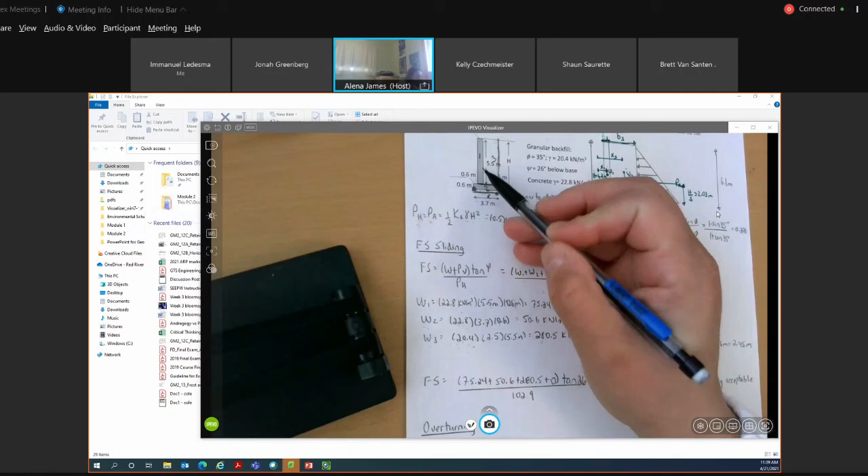To calculate the sum of the moments about the toe, you also need to calculate the distance of your lever arms. So looking at shape number 1, I'm comparing the distance of those lever arms from the toe of your retaining wall structure - comparing all forces to this bottom left-hand corner. How far is the centroid of this shape from the toe? For shape number 1, the centroid would be in the middle of that shape.

It's hard to tell from here, but the distance from here to here is 0.6 meters, and the width of rectangular shape number 1 is 0.6 meters. So the centroid is 0.6 meters plus 0.6, the width of triangle 1, divided by 2. So the distance x1 from the toe of the slope to the center of triangle number 1 is 0.9 meters.

Looking at shape number 2, which represents this shape down here, the width of that shape is 3.7 meters. The distance from the toe of the retaining wall structure to the center of this rectangular shape is simply 3.7 meters divided by 2, which equals 1.85 meters.

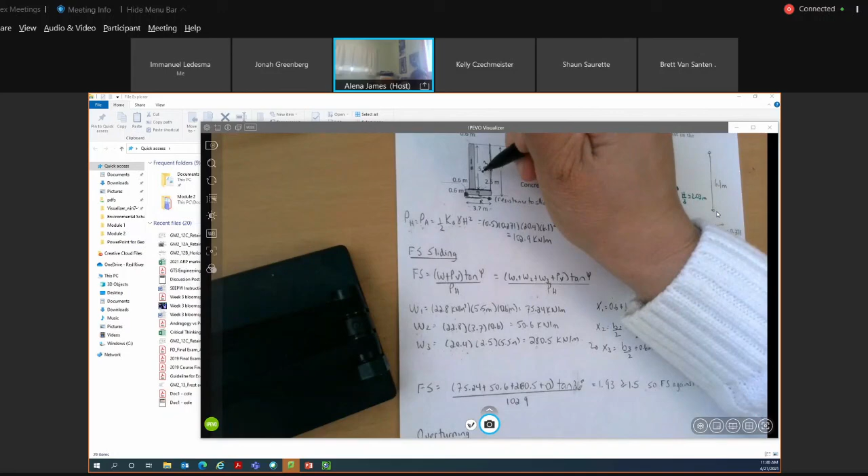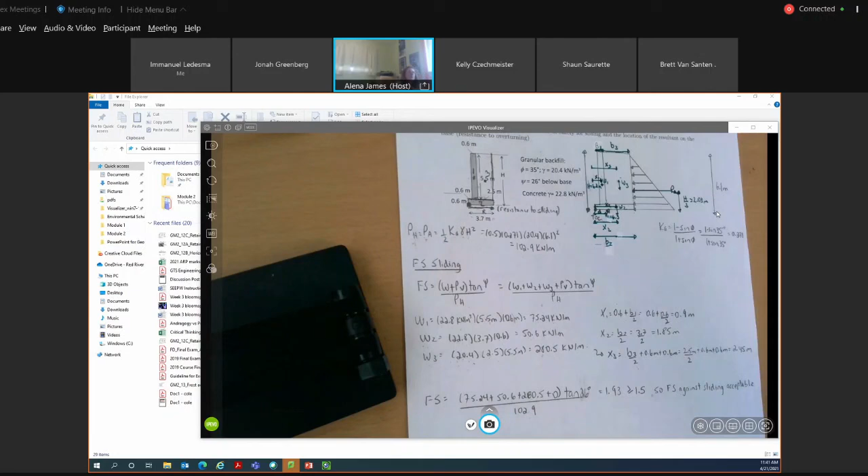Looking at shape number 3, the center would be right here. It's a little confusing from the diagram, but this distance is 0.6, this distance is 0.6, and this distance in here is 2.5 meters. So to calculate the lever arm for W3 from the toe of the slope, it's simply B3, the width of this third rectangular shape, which is 2.5 divided by 2, plus 0.6 plus 0.6. So x3, the distance from the toe to the center of that third shape, is 2.45 meters.

Now to sum the moments about the toe of my retaining wall structure, it's simply W1 x1 plus W2 x2 plus W3 times x3, minus my active force times h over 3, because the distance from the toe of my retaining wall structure to where my PA force acts is at a distance of h over 3 from the base. I've calculated that distance to be 2.03 meters, and that's simply divided by W1 plus W2 plus W3.

And so I've calculated W1, W2, and W3, and I've determined what X1, X2, and X3 are, and I've calculated what PA is above. So I go through and plug and chug through my numbers, which I've shown here.

So W1 was 75.2, X1 was 0.9, W2 was 50.6, X2 was 1.85, plus W3, which was 280.5, times X3, which is 2.45, minus my PA, which is 102.9, times my lever arm distance here, which is 2.03, which represents H over 3 from the base of the retaining wall structure. And that's divided by W1 plus W2 plus W3, so 75.2 plus 50.6 plus 280.5.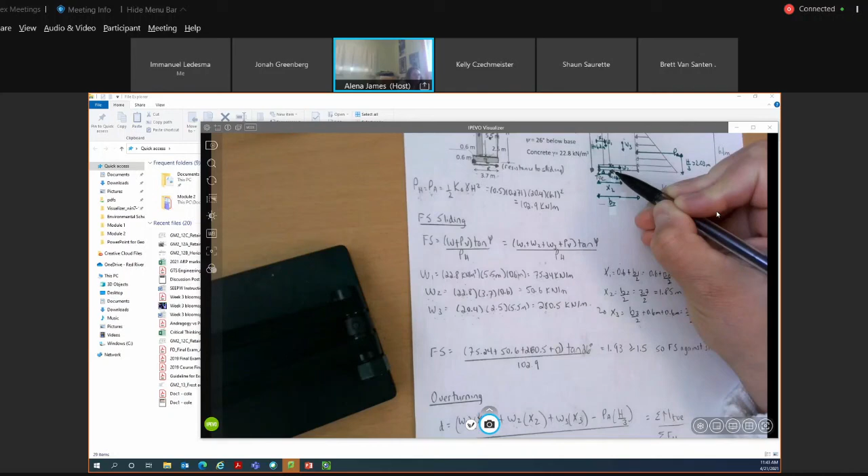So I go through all of that and calculate my distance D from the toe of the slope to be 1.57 meters. So this distance D from the toe of my retaining wall structure to where this resultant force acts along the base of my retaining wall is 1.57 meters. So D, from here to here, is 1.57 meters.

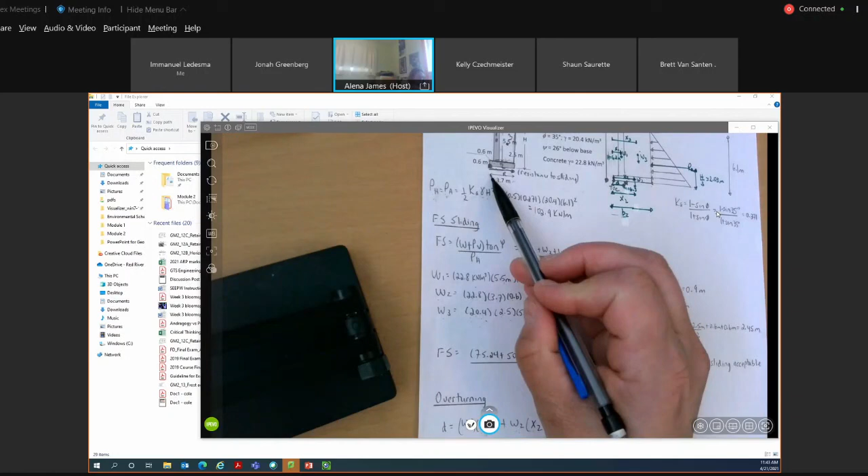So I need to compare this value of 1.57 that I've calculated to my middle third approach. What my middle third approach tells me is that B over 3, where B represents the width or length of this retaining wall structure along its base. The base of this retaining wall structure is 3.7 meters.

So B over 3, which is 3.7 over 3, has to be less than or equal to D, which is the value I calculated, which has to be less than or equal to 2/3 times B, and B represents 3.7. So if I go 3.7 over 3, that's 1.23 meters.

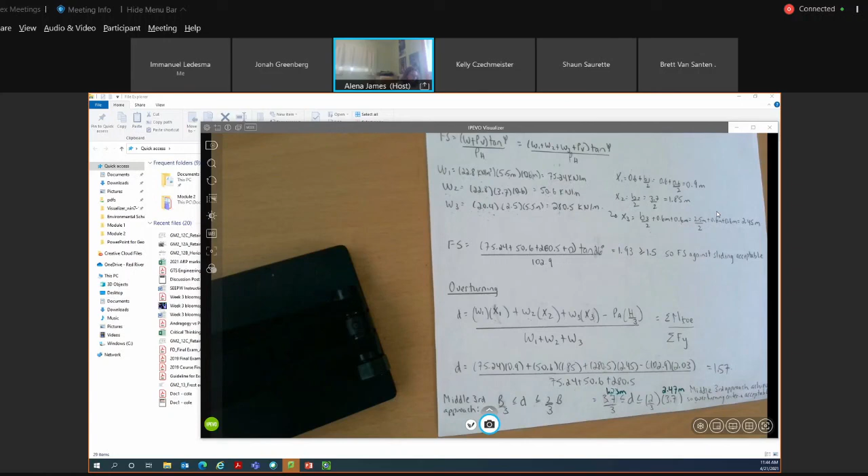And then I have to determine, is that less than or equal to 1.57? And is that less than or equal to 2.47? If I go through and do the comparison, yes, the middle third approach is satisfied because 1.23 is less than 1.57, which is less than 2.47.

But say, for example, I calculated my D to be 0.9, then you would say your middle third approach wasn't satisfied because this criteria cannot be achieved. So if your middle third approach is achieved, your overturning criteria is acceptable. If your middle third approach isn't achieved, then your overturning criteria isn't considered acceptable.

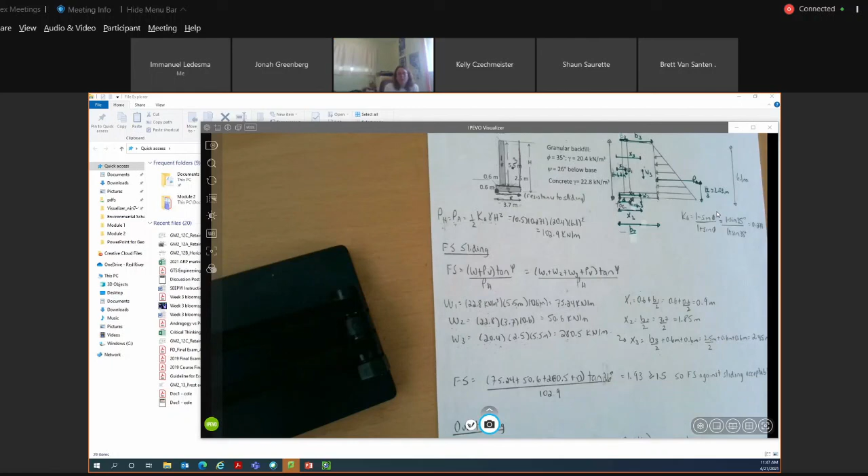More, right, so it weighs more. So the weight acting on the base of the retaining wall structure is more than what it would be if it was free draining. So you don't change the value of W3 in the sense that it becomes a buoyant unit weight. It still remains as a saturated unit weight because it's a force acting downwards.

But your PA value would change because you have to take that additional weight associated with your pore water pressure into account. So your PA value would become larger because you have that additional force from the water acting on your retaining wall structure.

That's if it is saturated. So for this example, because it was for free draining material, you use gamma bulk. But imagine if I gave you an example problem where water was at the ground surface. If water is at the ground surface and your backfill material is considered saturated, that's where these differences would arise. But in this example problem, most definitely, everything is in terms of gamma bulk.

So that's some food for thought. I think I've talked a lot today. It's probably information overload, so I think I'll give you guys some time to digest this.

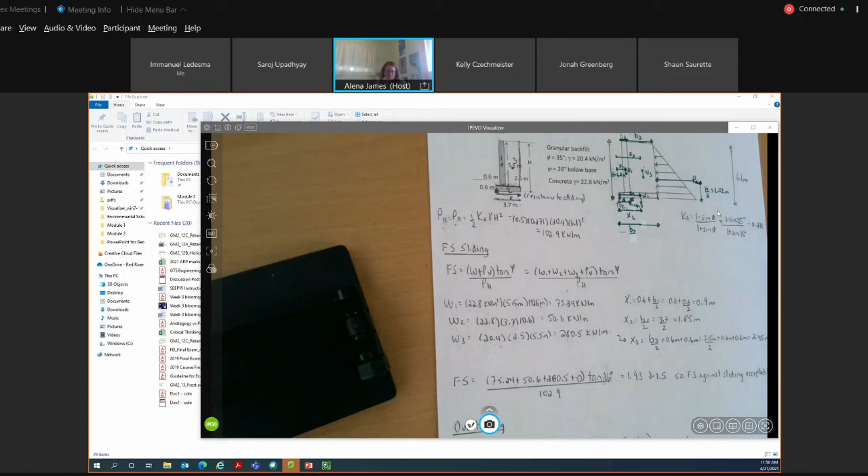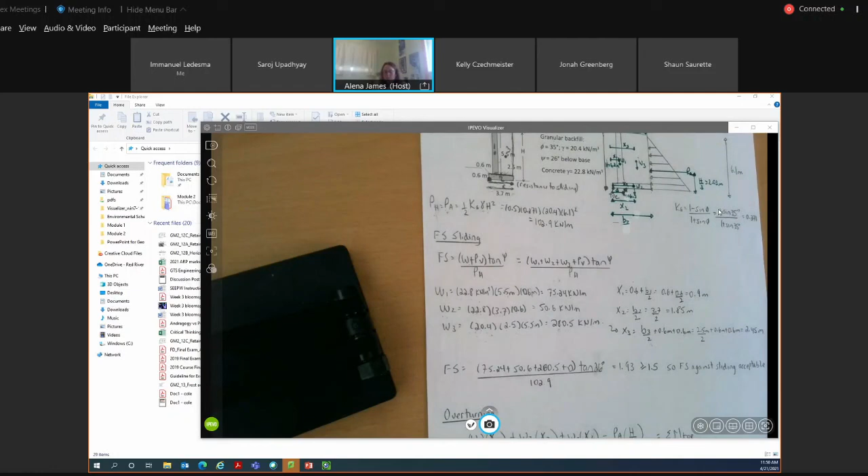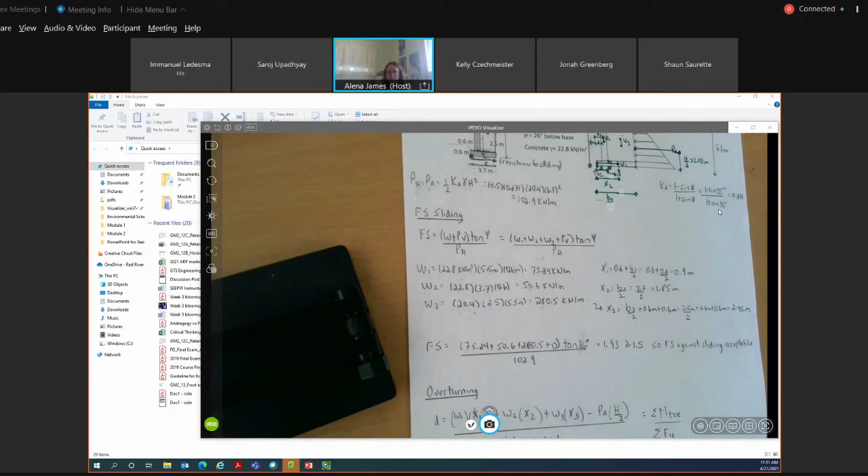Would you guys prefer this Friday to have, say, a one-hour session on factor of safety calculations, or next Wednesday? Oh, I think Friday works. Wednesday would be more helpful. Wednesday works too, doesn't matter.

Okay. I'll set something up. Okay, sounds good. And do we need to go over the frost action chapters?

Yeah, read that on your own, but what I'm going to do is send you 6 questions to ponder, and one of those 6 will appear on your test, and not everyone will get the same question. Does that seem fair to you guys? Sounds good. So if you prepare for all 6, guaranteed you will get one of them. And there'll also be a course reflection question for each student as well.

So just one question from the last chapter? Yes, just one question from frozen soils, correct. And it will be worth 2 marks.

I am available to help with the flow net assignment. I have a meeting after class with another student, but this afternoon or tomorrow or Friday is fine. Well, I guess it's due Friday morning, so yes, I'll be available for a bit this afternoon and on Thursday.

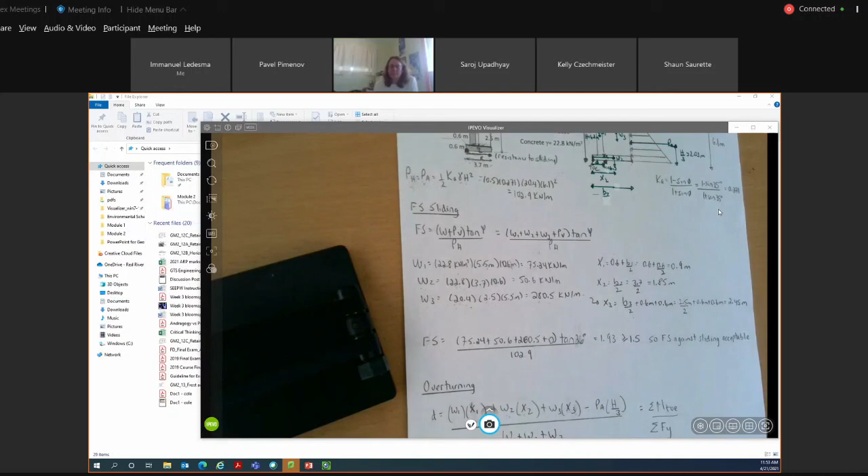Sure, I tried. I'm a stubborn lady, ask my kids. But I'm flexible at the same time.

Okay, I think you guys are probably spent. So thank you very much for joining me this morning, and thank you very much for being very understanding and cooperative in GM2 this year. I really appreciate your dedication and hard work. I know it's a lot of material to cover, and I know it's difficult material, but you guys have persevered and done really well, so I'm very proud of you. Hopefully you can retain some of the knowledge from this course, and you'll find it useful in your careers. So thank you very much.